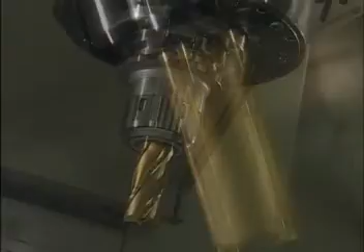NT Tool is pleased to introduce our newly developed milling chuck, the Super Tite Lock CT-S series, available in BT, CAT, and HSK tapers.

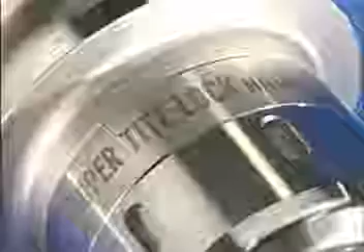The CT-S Super Tite Lock milling chuck retains the physical dimensions of our popular CTA chuck, designed for light to medium cutting, but has the added advantage of being able to take the heavier cuts usually associated with our CTV chucks. The CT-S is truly a general-purpose holder capable of going from finishing to heavy roughing cuts with one body, all while maintaining an economical size.

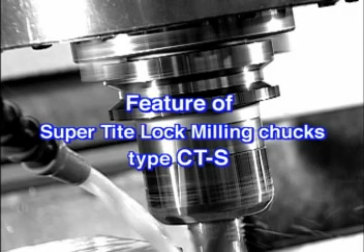Let me highlight a few of the technical features which will illustrate why NT's Super Tite Lock CT-S milling chuck should be your first choice.

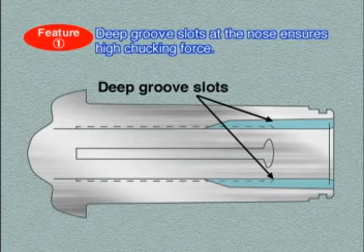First, NT has incorporated 4 deep groove slots spaced equally around the ID of the bore at the mouth of the tool, dramatically improving gripping forces in this critical area.

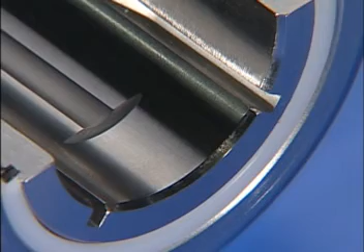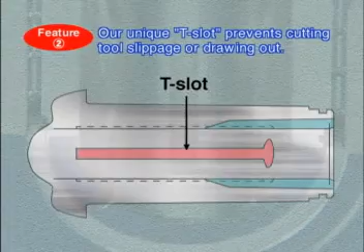Secondly, NT's patented T-slot grooves in the same area of the bore not only increase gripping forces, but also reduce micro vibrations, allowing heavier cuts to be taken.

This combination of deep groove and T-slots ensures a tool which will be held securely with increased protection against tool slippage.

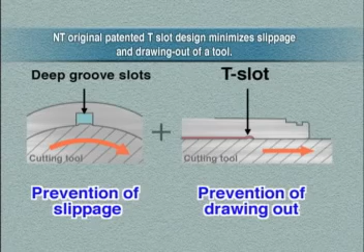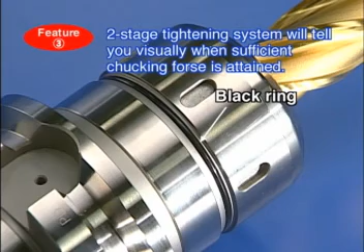Another unique feature of NT's Super Tite Lock CT-S milling chucks is the 2-stage tightening system. Comprised of a black ring indicator and a tightening stop system, adjustment for cutting conditions ranging from finishing to roughing becomes easy and error-free.

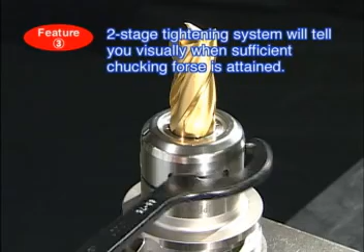When tightening, you are ready for high accuracy finishing and general machining when the black ring disappears from sight.

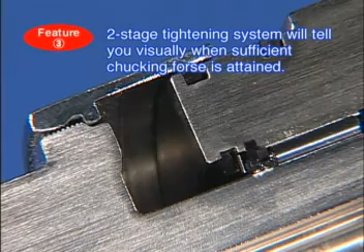Continue tightening until the tightening stop system engages and you are now ready to perform those heavier cuts you need to make.

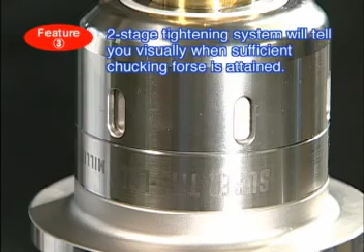Due to the unique design of the Super Tight Lock holder, through coolant is delivered directly and efficiently without the need for additional seals, as long as the tool shank is inserted past the deep groove slot.

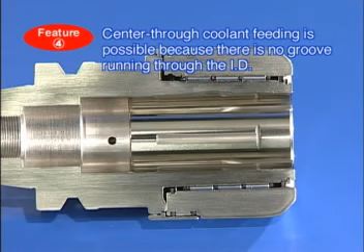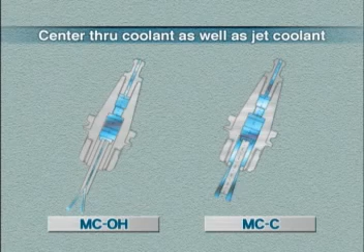If using a cutting tool with a shank diameter smaller than the bore of the Super Tight Lock holder, NT's specially designed MC-OH coolant collets may be used. This will allow you to take advantage of the through-the-tool coolant capabilities, still with no additional seals.

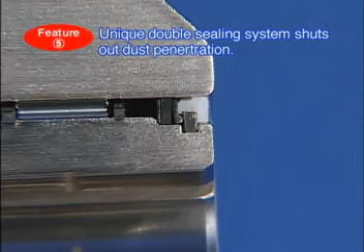The new double seal design of the Super Tight Lock holder allows you to run aggressive cutting data and also contributes to extended holder life.

NT's double seal system, with a resin seal at the mouth of the tool and a rubber seal behind the locking nut, combines to create a sealed system. The internal components of the holder are protected from dust and other contaminants, reducing maintenance costs and extending holder life.

Another advantage of the resin seal at the mouth of the Super Tight Lock milling chuck is security, allowing for machining at high RPMs without fear of seal releasing.

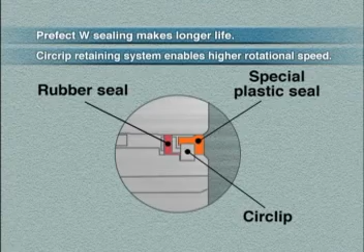In review, the new Super Tight Lock milling chuck from NT, incorporating new and unique design features, provides superior gripping forces and the ability to cover the full machining spectrum, from finishing to roughing in one economically sized tool.

Now, let us look at some actual machining examples.

Our first demonstration will be profiling in carbon steel JIS code S50C, AISI code 1049, with a 32 mm coated high-speed steel end mill with 4 flutes.

Cutting conditions for this demo are 380 RPM with a feed rate of 152 millimeters per minute. The axial depth of cut is 60 millimeters, and the radial depth of cut is 3.5 millimeters.

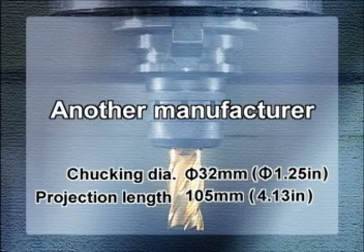First, we will perform the demonstration with a milling chuck from another manufacturer. The holder is a BT50 with a 32 millimeter bore and a gauge length of 105 millimeters.

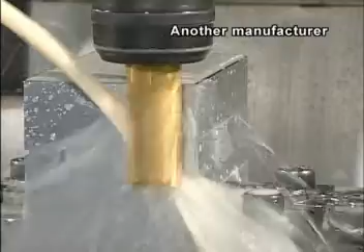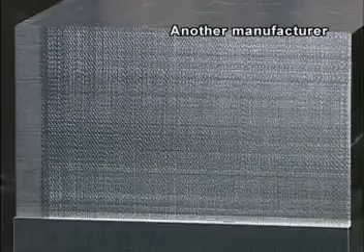Upon inspection, it is evident that there was chatter during the cutting operation, resulting in an unacceptable surface condition. As a result of this chatter, in addition to poor surface finish, machining accuracy will suffer, and the cutting tool edge will fail prematurely.

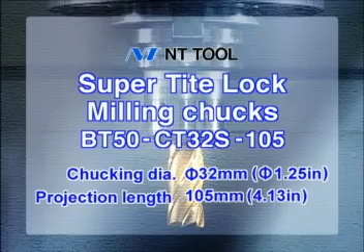Now, we will run the same demonstration with no change to the cutting data using a Super Tite Lock CT32S milling chuck. Again, the holder is a BT50 with a 32 millimeter bore and a gauge length of 105 millimeters.

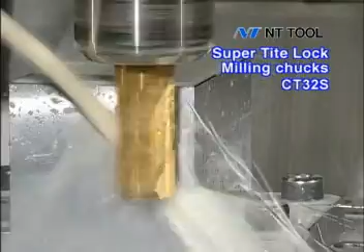As you can see, the operation was successful. The problem of chatter has been eliminated thanks to the stability provided by the CT32S Super Tite Lock milling chuck.

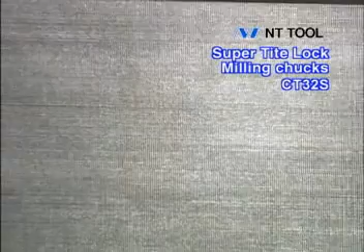Let's take another look at the two parts. As you can see, there is an obvious improvement when using the CT32S milling chuck.

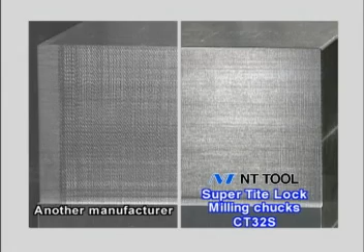Now, we will run another demonstration, this time performing a roughing cut. The material is alloy tool steel JIS code SKD11, AISI code D2.

The cutting tool is a 6-flute high-speed steel roughing end mill. We will be removing 127 cc's of material per minute using the following cutting conditions: 212 RPM with a feed rate of 106 millimeters per minute, and depths of cut at 40 millimeter axial and 30 millimeters radial.

Once again, we will first run the demonstration using a competitor's holder with a BT50 taper, a 32 millimeter bore, and a gauge length of 105 millimeters.

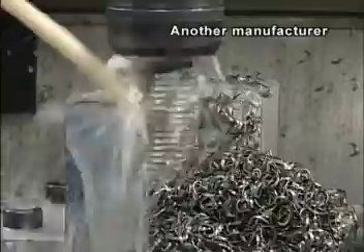When using aggressive cutting data, a common problem is slippage of the cutting tool in the holder body.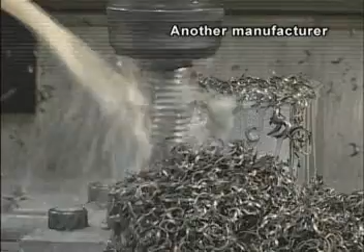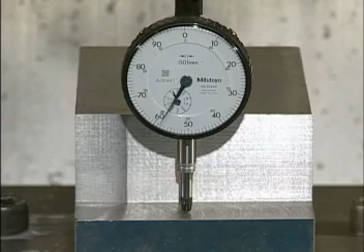Let's check for parallelism at the bottom surface. It can be seen that, even over only a short distance, the cutting tool has already slipped 0.5 millimeters.

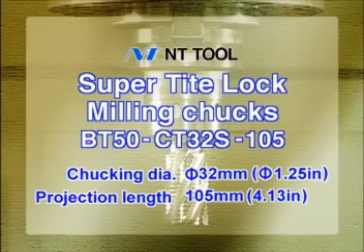We will run the same demonstration using NT's BT50 CT32S 105 Super Tite Lock milling chuck.

An acceptable surface has been generated.

Now, we will see if any tool slippage has occurred using the CT32S milling chuck. The cutting tool has not moved at all.

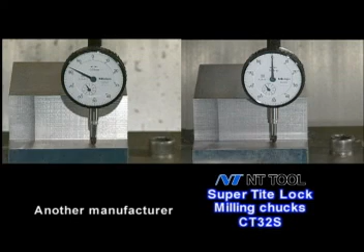Let's compare the two results. Competitor's milling chuck: tool slippage of 0.5 millimeters. NT's Super Tite Lock milling chuck: no tool slippage at all.

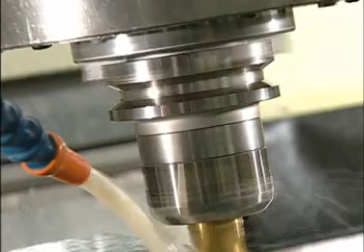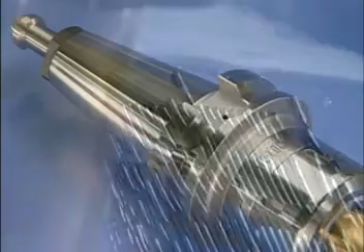In closing, we have demonstrated for you that the Super Tite Lock milling chuck from NT Tool should be your first choice for operations ranging from light to heavy-duty cutting, providing you with the accuracy and rigidity you require in an economically sized package. Super Tite Lock from NT Tool.